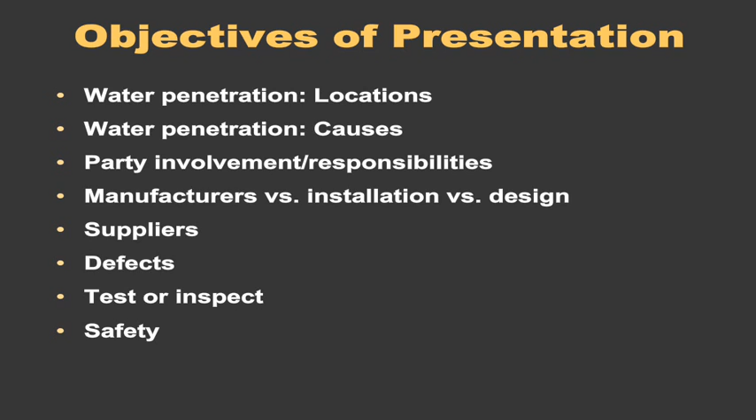Now, one disclaimer, although I know most of the people on this call are attorneys, this is a disclaimer I use in all of my presentations. I do not provide legal advice. I am an engineer, so I can provide you with technical advice or my take on what I have seen in contracts. If you need legal advice, consult a lawyer, not an engineer.

Typically, I also ask if anyone in the room is from the press. I hope that there isn't anyone today. I'll be able to talk more freely.

Now, first, I'd like to start with just a pop quiz. And this is quite important for your perception of forensic engineers. Outside of the difficulty making small talk, what do homicide detectives and forensic engineers have in common? A few moments just to ponder that.

The answer is a search for the truth. And the photo you see is of Rene Descartes, who is credited with inventing or being the father of the scientific method.

Now, per Jack Valentine, who gave me permission to use the following couple of slides, the investigative process, according to him, is to seek the truth. That was the key item. Follow the evidence, collect items to support the facts. Never investigate to a predetermined conclusion. Never lose sight of the evidence that presents itself.

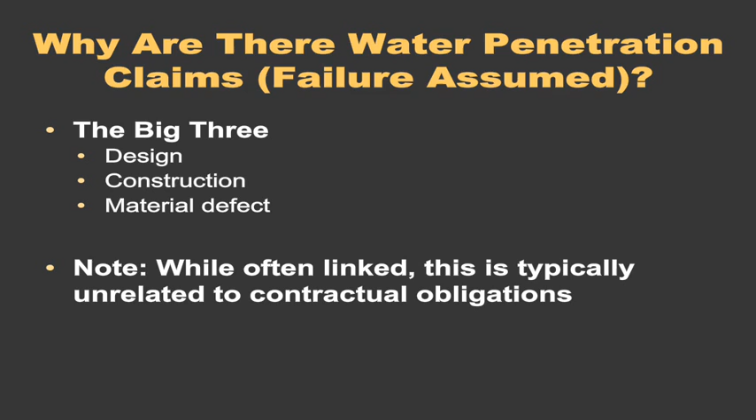Why are there water penetration claims? Again, assuming failure, there are other causes besides the three I mentioned. There can be outside loads, applied loads. There can be alterations to a structure or building. Usage may have caused the defects or problems to occur. Maintenance or lack of it. Just general aging. There may be material incompatibility, separate from a design or construction issue. Other causes, such as vegetation, can cause water penetration, as can the disasters we're familiar with. And lastly, when all else fails, we go to the unknown as a cause.

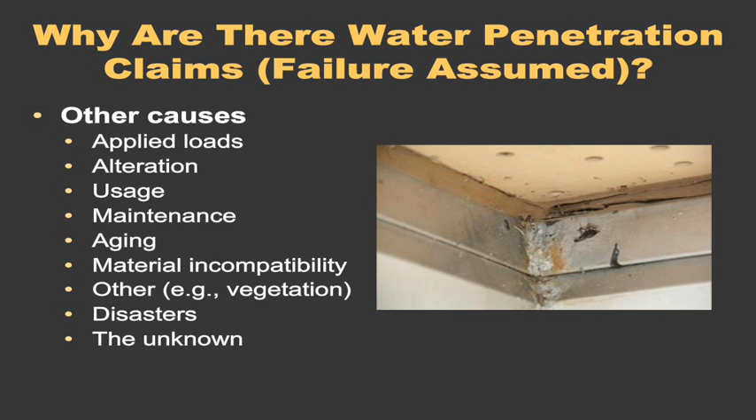Now, what are the common downfalls of water penetration investigations by the expert? This is usually, at least in my experience, lack of correlation of a defect with water penetration, lack of correlation of a specific damage to a specific defect, and lack of accepted test methods.

How does this play out in the field? Someone sees damage on the inside, sees a defect on the outside, and they conclude this is the cause of that problem. Often it is not—it needs to be proved. If one sees a penetration on cladding on the outside, that may be completely unrelated to the water damage which may be in proximity on the inside.

Test methods include spray tests, but I have seen people just take a garden hose and hit the building as hard as they can with a high-pressure spray—almost guaranteed to get through one way or the other, and that would not be accepted. There are ASTMs, which I'll get into later. There's also a failure to use pertinent codes and standards, not just in testing, but related to the investigation.

A repetitive problem I come across is experts who use an outdated code, or a code which was not present at the time of construction. They try to apply new criteria to old problems.

There may be a failure to acknowledge that there are mitigating issues. Typically this happens with defense experts, where, say, the expert has a client representing the exterior insulation and finish systems, and they will then put the blame on the roofer or the flashing at the roof, completely ignoring that there may have been other issues which the EIFS provide. Or they may be looking at one issue and forgetting there may be many others—that's related to acknowledging contributory issues.

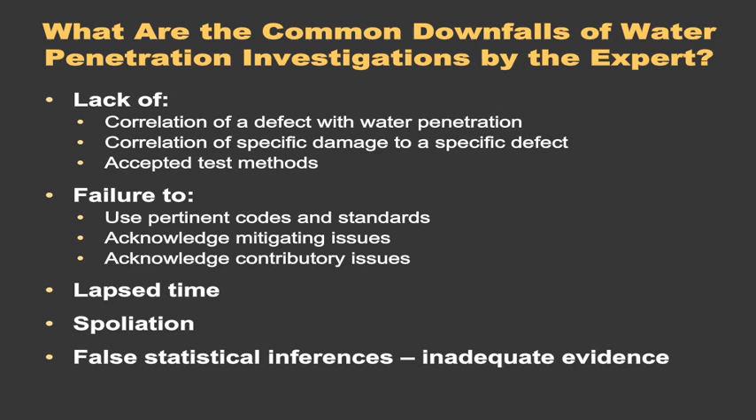In all these cases, the expert is acting as an advocate. If you remember one of the earlier slides from Jack Valentine, one must have an independent thought and not come to a predetermined conclusion.

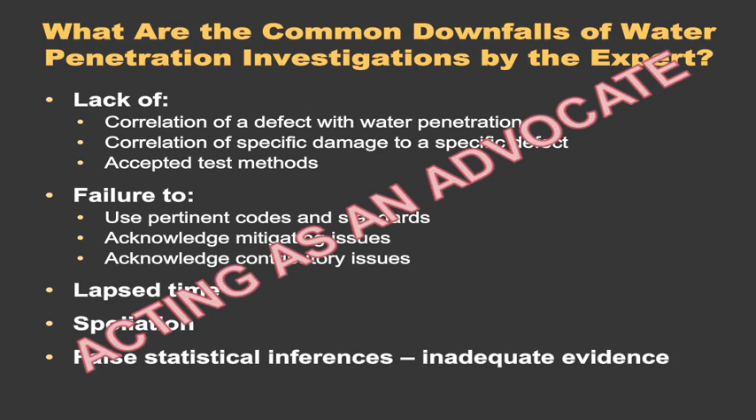What are the common downfalls of engagement by the client? That would typically be the attorney, but it could also be a loss adjuster, an insurance company, or the building owner of an expert. First is lack of an adequate budget, and conversely, an excessive budget can also be a downfall.

If one is not able to carry through the investigation to a conclusion, it will be premature and may be undermined by other parties. Restricting the scope - say there's a roof issue, but the person out there looking at the building is there for sealant. There may be a restricted scope to look only at the sealant, and then they will not be able to get the mitigating issues which arise at the roof level, which actually cause the damage, only looking at whether the sealant is a problem.

A failure by the client to provide all necessary documents. This would often come under lack of an adequate budget, which was available in order to do an investigation. I have been on the stand where I was provided with documents I had never seen, and they did in fact change my opinion to some limited degree.

Also, directing the expert - that's similar to restrictive scope. This is separate from the ethics issues which I know attorneys have of directing an expert or writing the opinions for the expert, etc. But this is pointing the expert to look at a certain area and not at other areas. Unrelated to water penetration, I was lead investigator for the 51st Street tower crane collapse. First day out, the DOB told me to look at the welds as being the likely cause of the failure of the crane. Turns out they were unrelated.

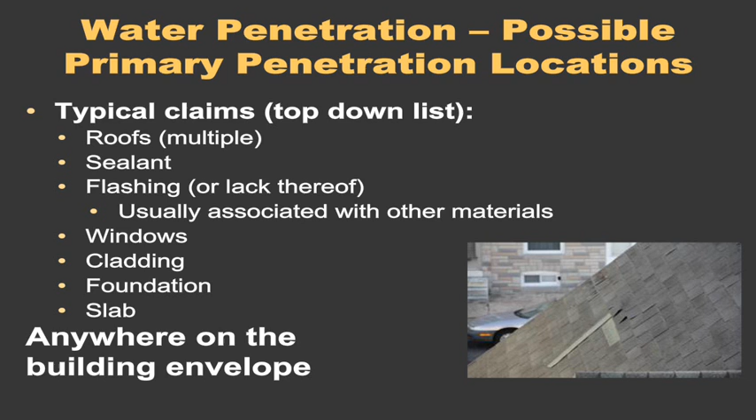However, the investigation included construction and design of the joist, the roofing, the maintenance, how the roof had been used, and other issues that were related. Other items besides snow loads include deflection, thermal loads on the roof, differential thermal expansion, and roof traffic.

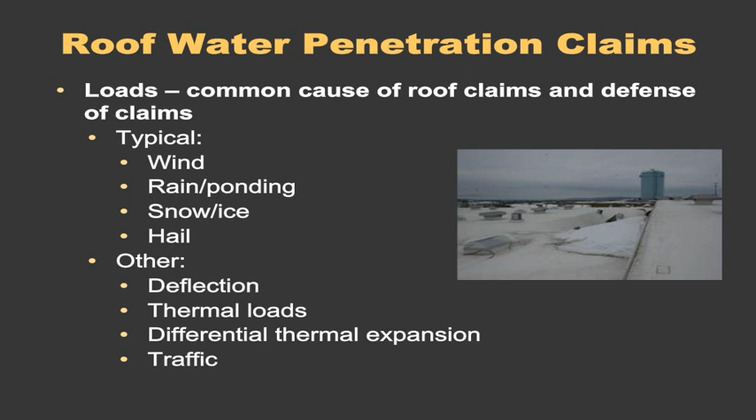Sample alleged issues specific to roofs can be the presence or absence of an adequate ice shield, the slope of a roof, sheathing on the roof below your shingles, the type of sheathing, the gaps that may be present, nailing, whether there are clips, whether they're supported properly. The shingles themselves, again, the same: type, laps, nailing, or other damages that could have taken place from people being on the roof, from hail, pre-existing damage.

Penetrations, I mentioned earlier. Flashing, there are many different types of flashing which are related to roofing. They all may contribute to a water penetration claim. Typically, in this particular list, diverters are picked up as being a cause, mostly because they may be absent, and step flashing around chimneys is more common than other causes. Gutters and downspouts are also sometimes flagged as being either inadequate or missing.

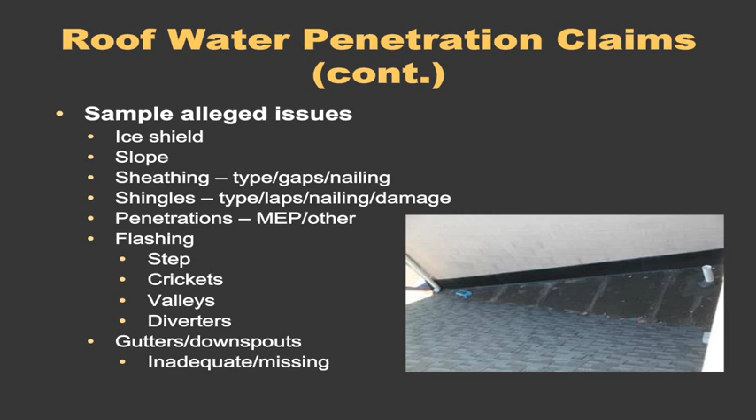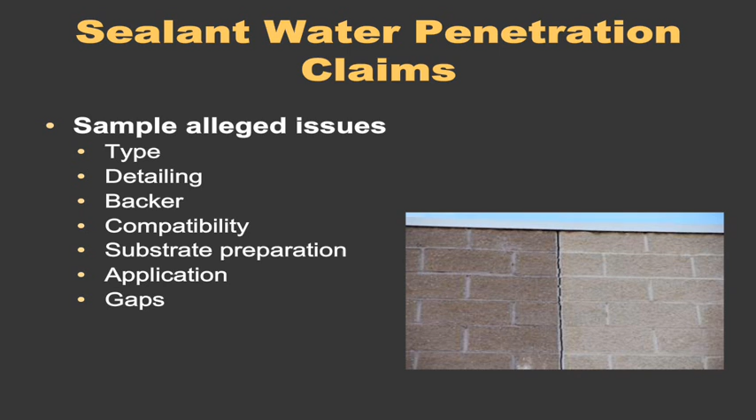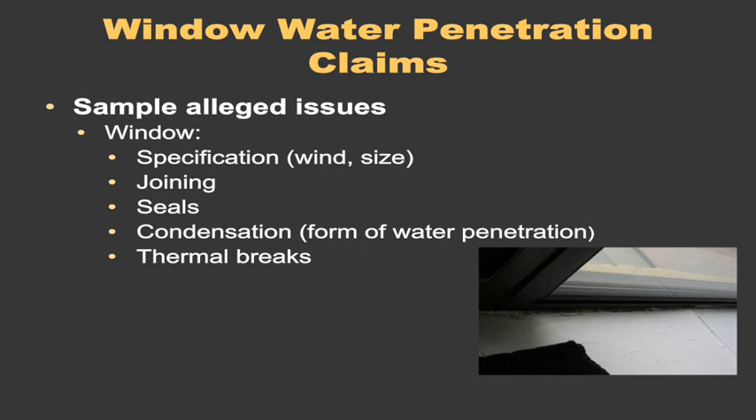The seals of the windows, the lights, the seals there, the sealant that goes around the window and how it's been installed, particularly for finned windows, whether sealant is present at all behind the fins. That's often looked at as the last line of defense, and they are often faulty. Condensation, which is a form of water penetration, can also occur, and that may arise from thermal breaks or lack of them.

Window water penetration claims, again, sample alleged issues with construction and detailing: the framing, performance of the window, fins or lack of them, the nailing, the weather-resistant barrier, the building wrap, and the sealant. That's a list. They all go together. They all have detailing issues. One needs to go on before the other. They need to lap over each other so as to shed rather than collect water. And these are the issues that would come up mostly with windows.

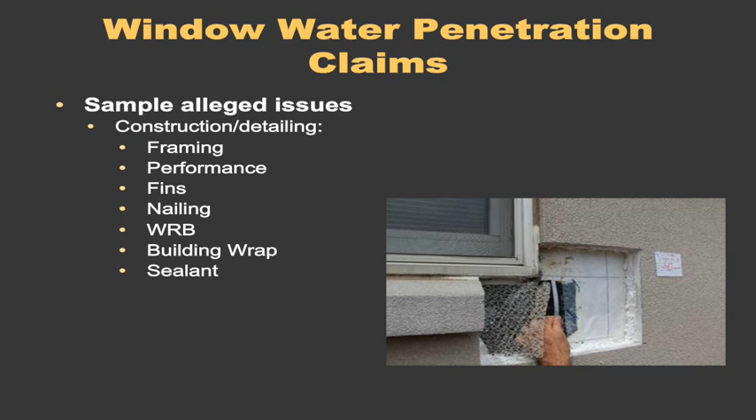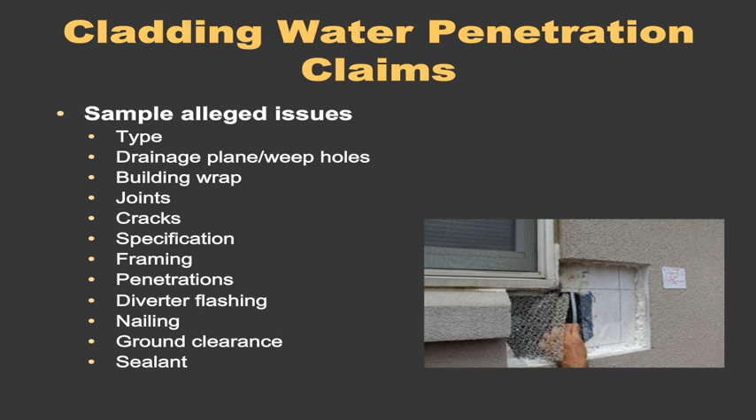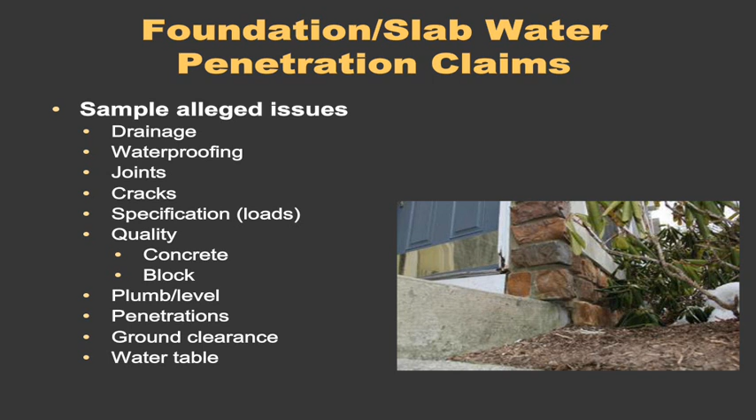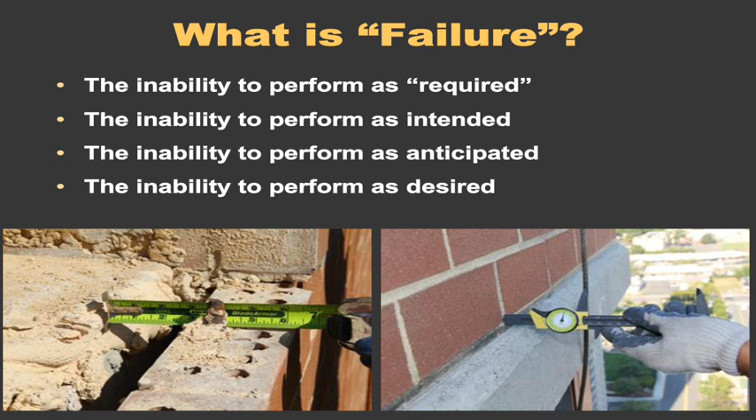Now, getting into failure itself, this is a slide I use in classes that I give to engineers on failure. And what is a failure? In my mind, failure is the inability to perform as required, or to a lesser extent, it's the inability to perform as intended. It can be the inability to perform as anticipated, or it may simply be the inability to perform as desired. And they all have different types of causes which have priorities associated with them. The first would be more related to codes and regulations. That's the requirement. Contract and specifications, that's as specified. Whether or not it meets the brief. Industry standards, manufacturer's warranties, that's what is expected, despite what the contractor specs may say or the codes or regulations say.

And then after it's all built, the expectations of the client and whatever a designer may have promised may then supersede the others in terms of what was expected by the client, and that can result in a claim. They come in all different forms of failures.

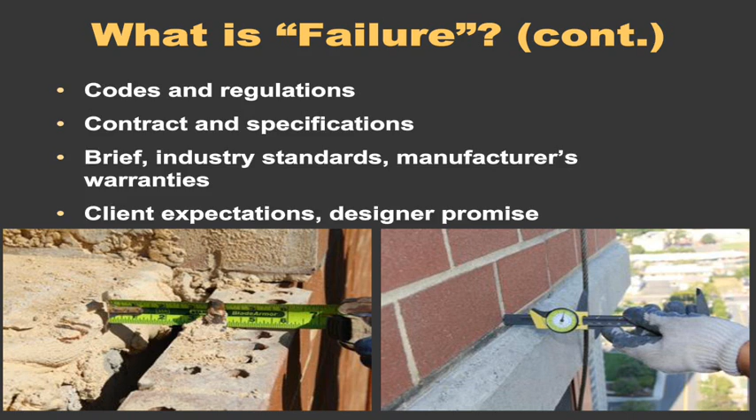Again, in terms of what is failure, this is my own opinion that if there is no water penetration, then there is no failure, regardless of whether it complied with codes, regulations, contract specs, etc. That doesn't mean there isn't a claim that it didn't comply with codes, but I do believe that there would not be a claim then that there was a water penetration problem.

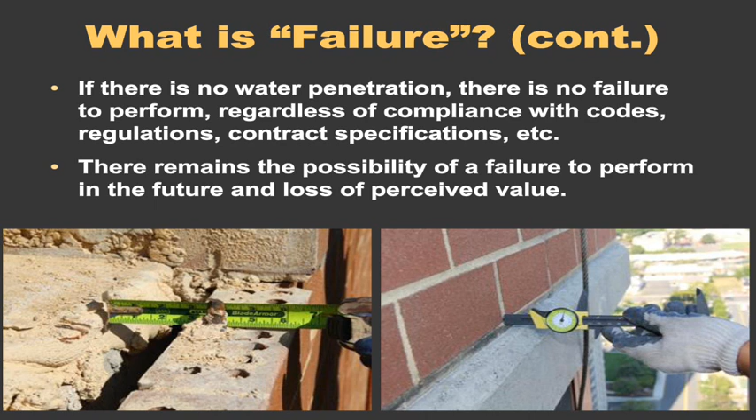However, there would still remain the possibility of a failure to perform in the future, as well as a loss of perceived value. So if you're not getting any water penetration today, it doesn't mean that you may not get any water penetration tomorrow. And if you don't have any water penetration tomorrow, when the building is sold, it may still have a loss of value due to a defect in the original construction.

When engaging an expert, first of the questions are the scope of work. What happened? How did this happen? Why did it happen? What could have been done to prevent this? What can we do now? And particularly for litigious projects, who did it? The who issue is never present, or I've never found it to be present, when there isn't litigation involved.

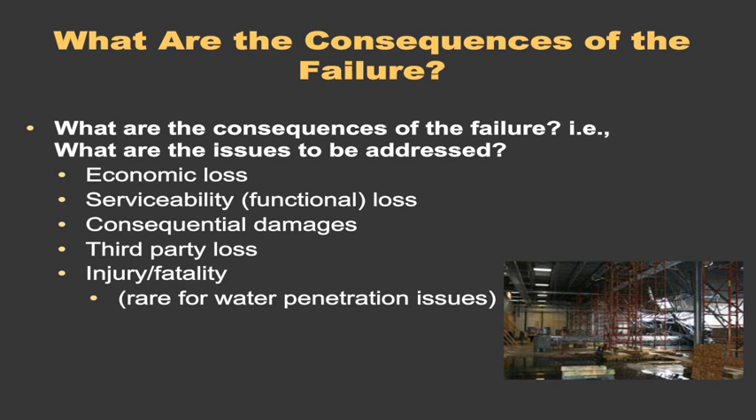Now, the complaint itself is defined as a contract scope for the expert. When I do defense work, I look at what the complaint is, and that is what I will be addressing. That doesn't mean I don't look at mitigating factors, aging factors, and items unrelated to the complaint itself, but the complaint is the focus of the work.

For a plaintiff engineer, they may be asked to assist in determining a complaint: where are the problems, who might be involved, how extensive is it, and are there other issues that may come up?

Now, potential issues which come up have to do either with a complaint or with defense of a complaint. With the owner, there's use versus abuse, there's the maintenance - whether it's occurred - and exclusions, which are particularly important for insurance policies. The photo to the right is a roof which has not been maintained, with trees growing on it, which caused cracking in the concrete, resulting in water penetration and severe corrosion underneath.

With regard to the designer, they are often named in a lawsuit with regard to water penetration, even if the original design was adequate. But the questions are: was the original design signed and sealed? Did they accept the owner's terms? Do they accept the manufacturer's information that came in? Did they accept the contractor's work?

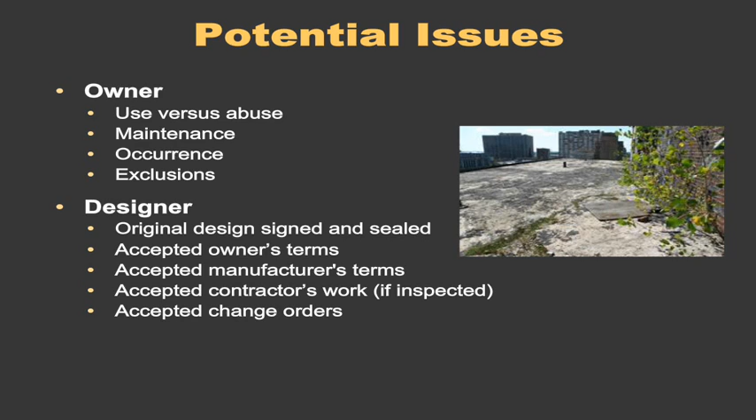Now, I have here 'if inspected' - but if they need to approve the payments and are using the standard AIA forms, one may wish to argue that that deems they did or should have inspected. And did they accept change orders? Did they know what was actually built? Did they have responsibility for ongoing construction?

Getting on to the GC and the subs, they needed to accept the design by the design professionals. They need to accept the materials that are provided. They installed it, they will have supervision responsibility, and they are responsible almost always - not absolutely, but nearly always - for the means and methods of installing these materials.

And then they also usually have the responsibility for issuing and obtaining the warranties. All of these are potential issues for them if there's a water penetration problem.

When you get to the manufacturers and suppliers, again, they accepted the design. The architect or the engineer may provide a flashing or waterproofing detail which flies in the face of what would normally be done by the GCs, and it doesn't follow what the manufacturers would normally recommend. But if they accept the design, that's a different matter in terms of whether there's a problem with the design itself. They accepted the installation, particularly if they are out there to look at the installation as it's going in or the final product, in order to provide those warranties which are typically requested.

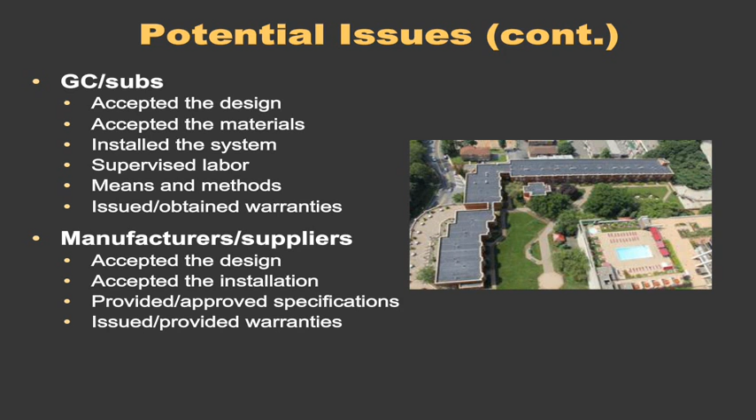You see, there's a lot of overlap between all these parties. Now, at the commencement of the investigation, I keep saying a failure, but it's a failure that's perceived. One of the first items to do is confirm that the perception is valid. There may not be any validity to the claim that there has been a failure.

The photograph on the right is not a water penetration issue, but illustrates the point. This is actually a claim that this lolly column was placed in the wrong place on a prefab truss joist, thereby putting loads into the joist, which could cause fracture of that bottom chord. Now, you look at it and you think, that lolly column really shouldn't be there. It should be at a strong point. It shouldn't be in the middle of a span which has no support above it.

However, the reality is that this lolly column was placed because it was part of an option by the designer builder, the developer of this building. The option was not used by the owner. So above this floor, there is nothing. There is no load-bearing wall. This lolly column does not see any load, and if one climbs a ladder and looks at the top of that lolly column, it's not actually touching the wood. So there's no transfer of load at all.

It looks wrong. It looks as though there's a problem. It was put into a complaint. The reality is it did not have any bearing on a functional loss of any kind.

Then what's the alleged failure? We've been through whether it's the GC, the designer, or the sub. Is it a material failure? Is it a systemic failure? Is it a system failure? So the individual materials are okay, but the way they've been put together no longer meet the criteria for a successful system. The EIFS, exterior insulation and finish systems, are typically brought up as an example for that.

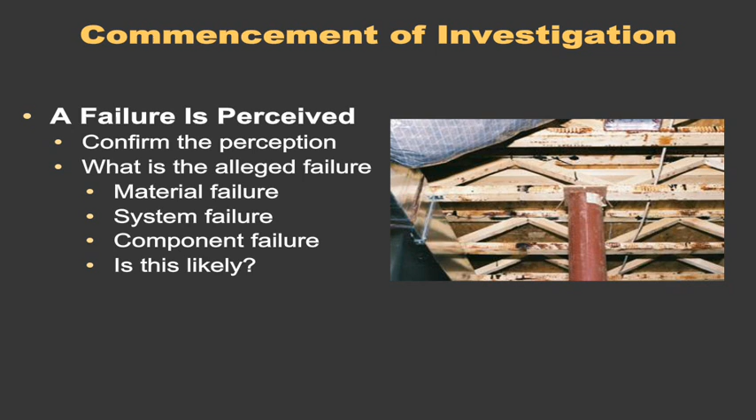So as soon as you get into that level, we're looking at a small subset. So the likelihood of failure goes down. It's simply an issue of the probability of things being wrong.

What are some of the mitigating factors to the investigation? This has to do with an earlier slide. It's a little bit of a repeat on the expert and the client. Is the scope limited or unlimited? Is the information going to be written or physical or both? What is the time available, which is not a fault of either the expert or the client. It's simply how much time is there to do the work.

The budget. A question I will often ask a client is, what is the size of the claim which is being pursued, or what's the possible size? Because it makes no sense for me to issue a proposal having a fee which is in excess of the claim. The scope of work for the investigation should meet what the potential reward or disreward may be on that project. And then what's the expertise involved?

I have seen mechanical engineers acting as roofing experts. I don't know why. I have seen structural engineers acting as hazmat experts. Again, it's fine in some sense when they are starting to do that. I would say it's unethical and doesn't meet the licensure requirements. But when it actually gets to the report and testimony, it will fall apart.

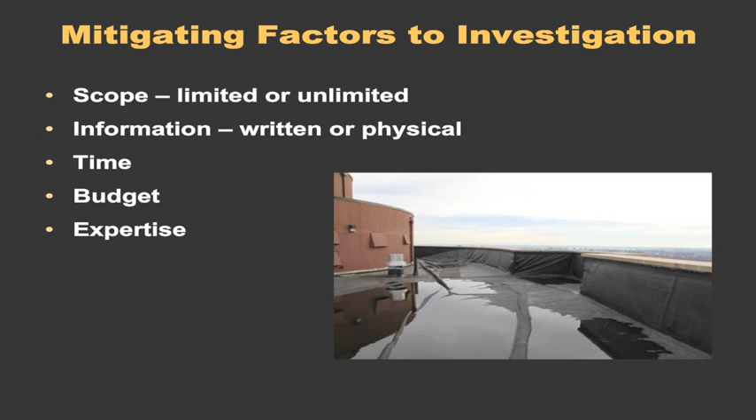Document collection. For all of you who have gone through discovery, you know what this involves. It can be extensive. The amount of documents may be enormous. Sorting through and finding the right documents can be very difficult, time-consuming, and therefore expensive. However, it's very important not to limit your expert too much in how many documents they can look through. They're the technical expert. You may not spot something which is relevant to their investigation. On the other hand, it's important not to have them go through reams of material which are clearly going to be unrelated to the problem.

This is a full list of these things. It goes on in terms of the number of documents that may be available. On the other hand, I've been involved in projects where the building no longer existed by the time a complaint came in, and the only documents available to review were photographs provided by the firemen and the police, and their reports on the building. That had to do with the fire damage.

Again, looking at photographs. I mention photographs for a specific reason, as they tend to be some of the primary evidence used in reports and the primary evidence brought into court, because you can see them, you can almost touch them - they're the most evident. A lot can be done with photographs.

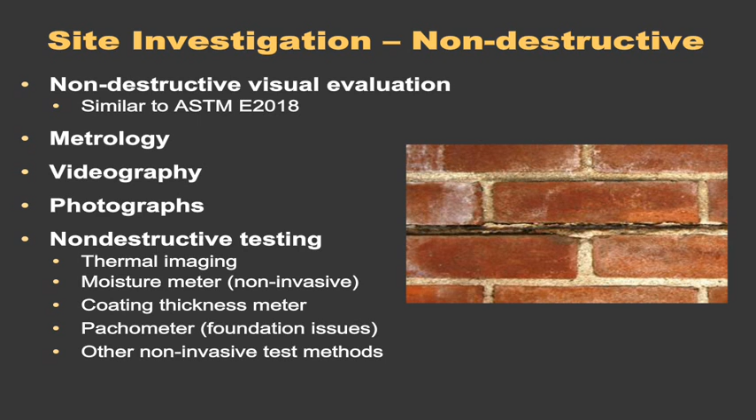It can include probing, which is highly destructive, material sampling, destructive testing, and water testing. Water testing is destructive in that the water is penetrating through and it's causing more water penetration problems typically.

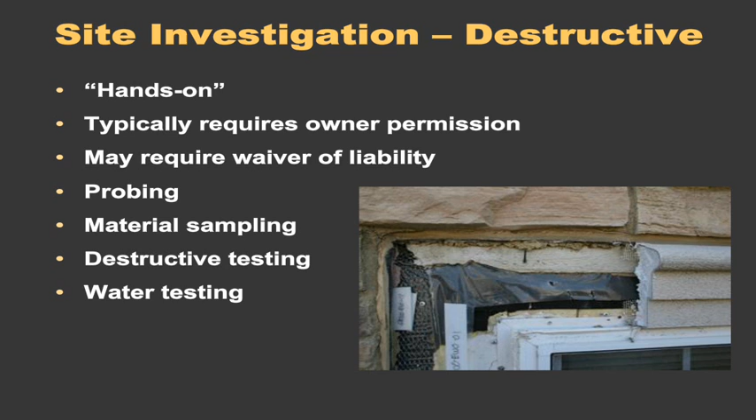Field investigation objectives: it's real-time data collection. You get as-built condition confirmation. When I say as-built, it's as-built at the time of the investigation, not as-built as at the time of construction. If there were modifications or repairs, aging effects, which I've mentioned previously, what you see may not be what you got in the past. There will also be as-built performance confirmation with the same caveats with the word as-built.

Preservation of evidence is an objective. It doesn't happen when there's destructive testing, but one wants to keep what was there as much as possible, and if something is removed, it's best to retain it unless all parties agree it can be thrown away. That includes the avoidance of spoliation. In terms of experts on site, I am always wary of one expert picking up a piece and walking away with it, which I have seen many times in destructive testing.

Other objectives: identification of possible hazmat issues. I've mentioned those as things that I have seen. Going into existing buildings or older buildings can have very high hazmat issues as well as confined space problems. Access may be a limitation. Getting to where one needs to be is itself often a problem.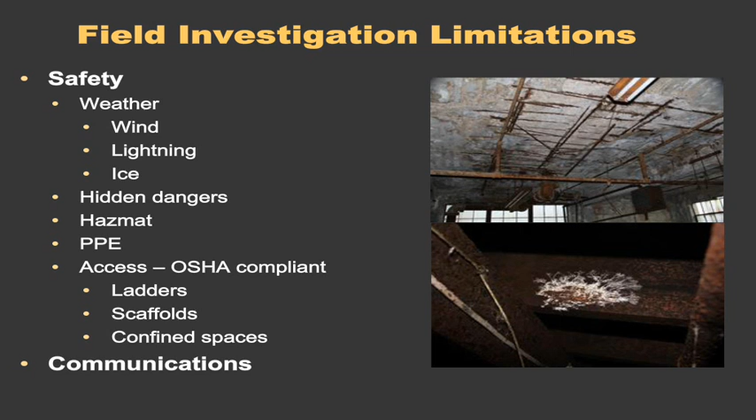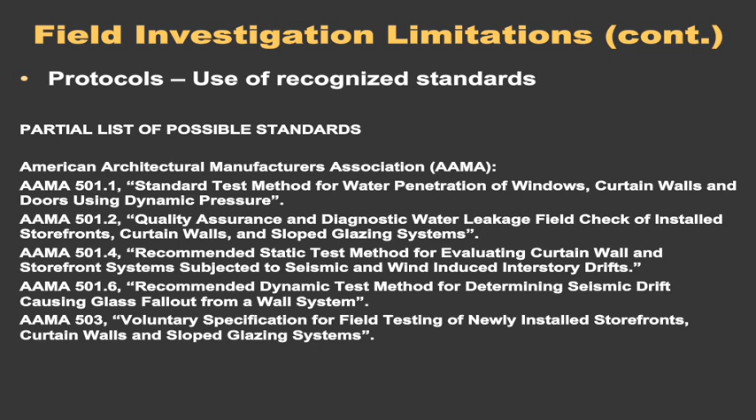There are many protocols. I'm not going to list these; this is more to show how many there are. This is only a partial list of possible standards. This particular slide has to do with windows, and it's only from the AAMA. The next slide is a partial list of applicable ASTM standards for various testing. This isn't materials, these are just test methods.

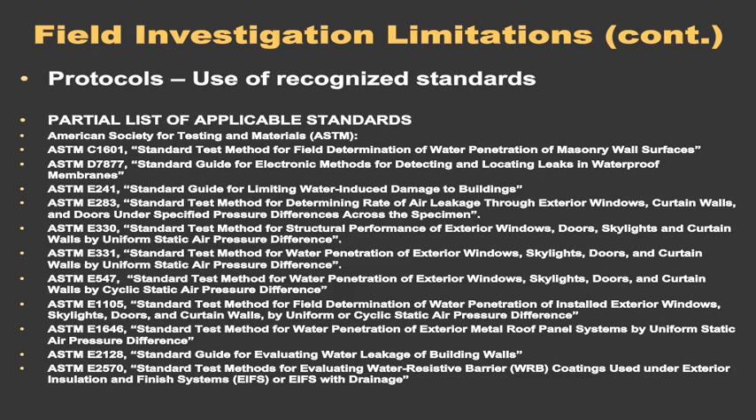Considerations in investigation analysis: these are the things that should be present in the report. The contract scope of the investigation, as well as the parties involved and the various responsibilities and chain of command—the hierarchy of responsibility, who goes first, who goes second. It definitely is a chicken and egg, but one has to be first.

Work coordination, manufacturer's defects, installation defects. I've mentioned this before: acceptance of prior work, consistency of the analysis conclusions, and what the standard of care may be in the investigation analysis itself.

Consistency of analysis conclusions: what is concluded must follow, as with Rene Descartes, almost the very first slide I had—it must follow from what you found before. The investigation needs to complete. It needs to point to an answer, not point to a predetermined answer. One shoots an arrow at a target. One does not draw a target around a shot arrow.

The standard of care for investigations: we always look at what was the standard of care of the architect, the designer, or the contractor. But what is it for the expert? There is a standard of care. The common definition is that degree of learning and skill consistent with professional skill and care exhibited and ordinarily possessed by professionals in good standing in that profession, in the same locality and under similar circumstances. That's the common definition for professionals.